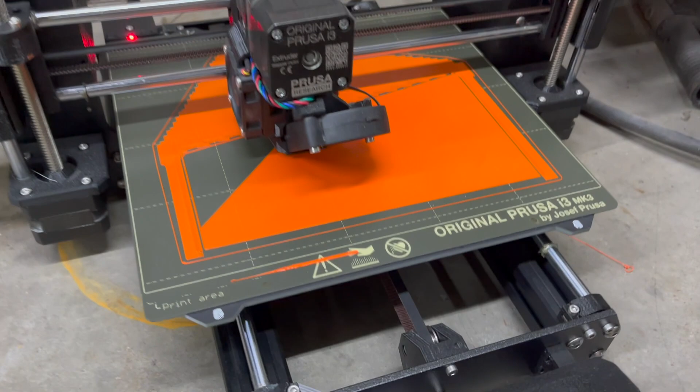So I am back in Arkansas, and I'm actually working on my newest version of the Nova brackets, which is now version 5. But just a little update.

I got the rest of Tom's chassis welded yesterday. Dennis and I are getting ready to put the chassis back on the chassis table, bolt all the suspension to it, put the body back on, and today it will roll off the chassis table. Then he's gonna start fitting doors, deck lid, front end, all that kind of stuff. After that, I'm not sure exactly what's gonna happen with it. I don't know if Tom and his guys will finish it or if they want it to stay here. So that's up in the air, but it's still gonna be a pretty cool video.

Just of us assembling, going back together, because my stupid phone screwed up and didn't actually get my time lapse of us taking the body off.

Side note, aside from doing the Nomad, I'm going to show you all the different revisions that I've went through of the Nova brackets, and now I've actually came to a 2-piece bracket that I'm going to weld together and then ship out as 1 piece. I was trying to keep it all in one, but with where the shock is versus where the control arm mounts, I couldn't get the shock mount somewhere to where I can actually unfold everything and have it cut as 1 piece, because they would all hit each other.

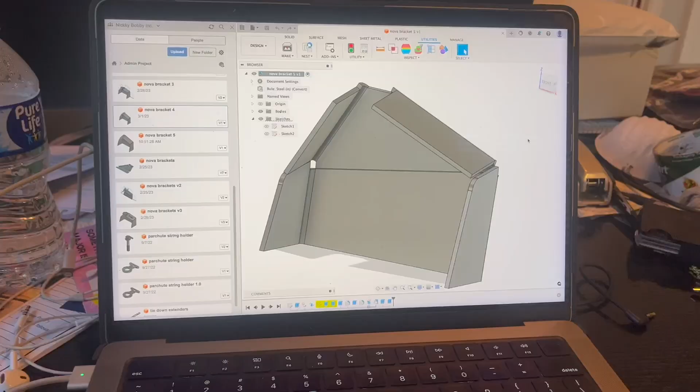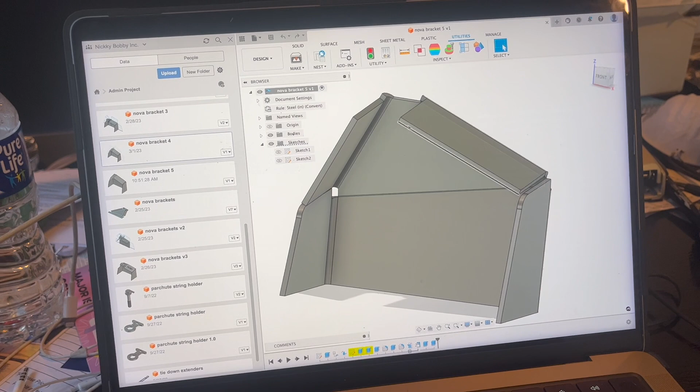So here's what I got, and here's what I'm thinking. This is my final version. It's actually gonna look a lot like the regular brackets I have now, but instead of having a shock piece that bends down here, I'm gonna have a separate universal shock mount that fits right in here, so I can sell a universal mount on my site, and I'll also use that same mount to mount the shock that I'll just weld around. I tried to have it to where I bent tabs down here, but there's no actual possible tool path in the world that can bend that tight of a radius that I need in this thickness of metal. So that option kind of went out the door.

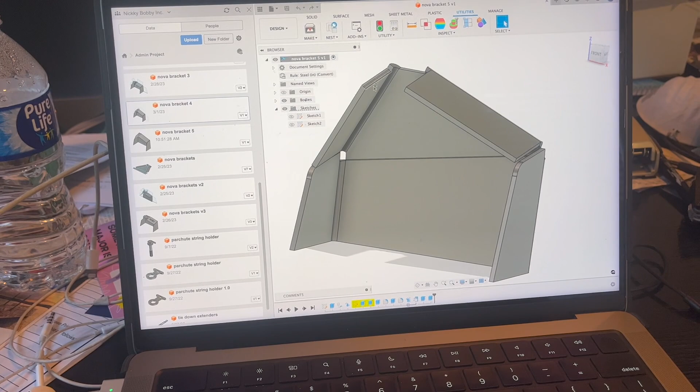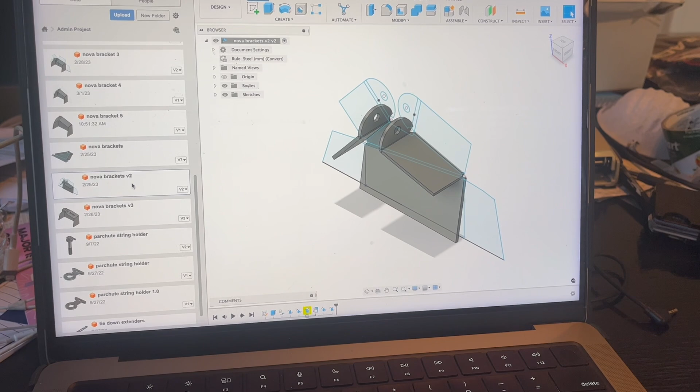But here's where I started at. Here's my first Nova bracket there, and it basically was not close at all, but it's almost the exact same as what the G body brackets were. Here's my second Nova bracket. I screwed it up majorly, so then here's my V3, which I thought was gonna be super close, but was a little too big. Then I got V4. That's where I bent the tabs down. That ain't gonna work. So now I'm at V5.

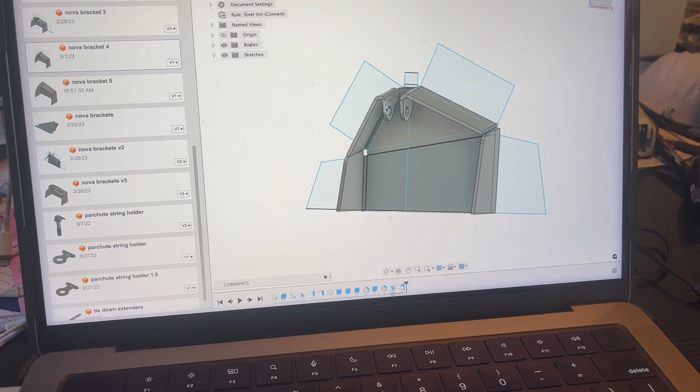So basically these tabs right here will just be a U-bend with these tabs that I will bolt into, or that I will weld into right here. So that's printing right now.

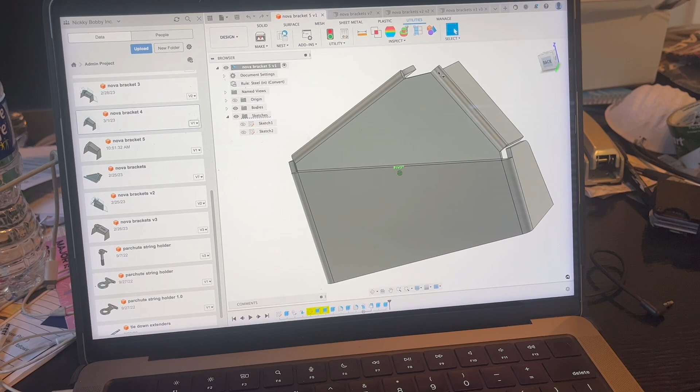I'm gonna go get started and get to work on getting that Nomad chassis back on the jig and the body back on the chassis, so that way I can get back to welding up the G body brackets and lift plates that I now have for sale.

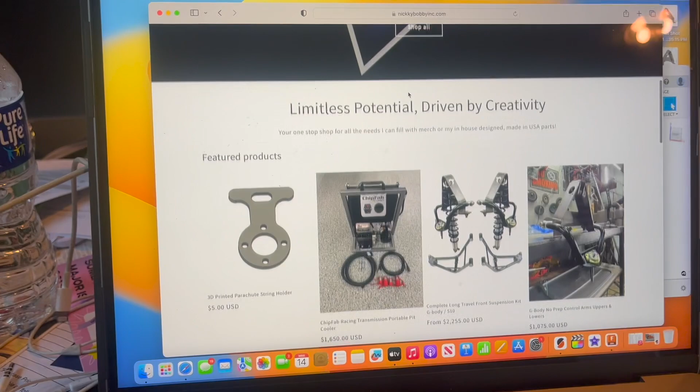So here's the new lift plates. Bada boom, bada bing. Designed by Bruner himself, called punch plates. They look like brass knuckles. Super cheap, 50 bucks. Then I've got the new and improved Nicky Bobby Inc. long travel brackets.

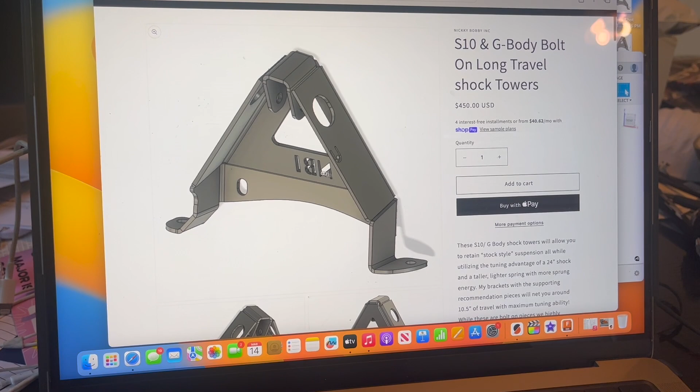These now have my logo in them. They're clearanced for if you already have TRZ arms. This little notch right here is for the TRZ arms because people were having to notch them. And I put this little tab right there, so that way you can basically take a punch and bend this in and then mount your shock travel sensor right there. It gives you a little tab to fold in. So those are the new improvements on that. Nothing crazy.

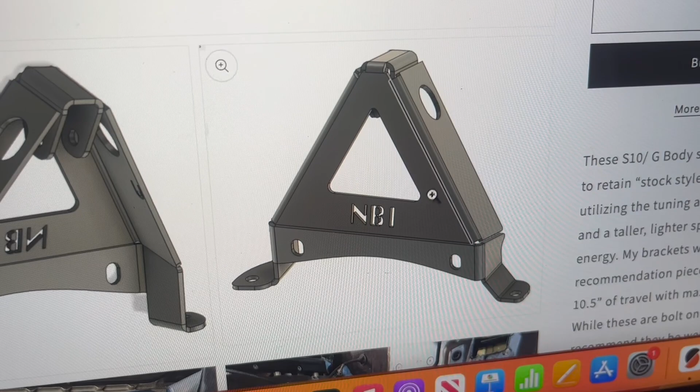As you can see, I did round the fillets on those edges because they were pointy and people said I should fix those. So I fixed a few little things on that, but mainly I've been working on the Nova brackets. So that's where I'm at now.

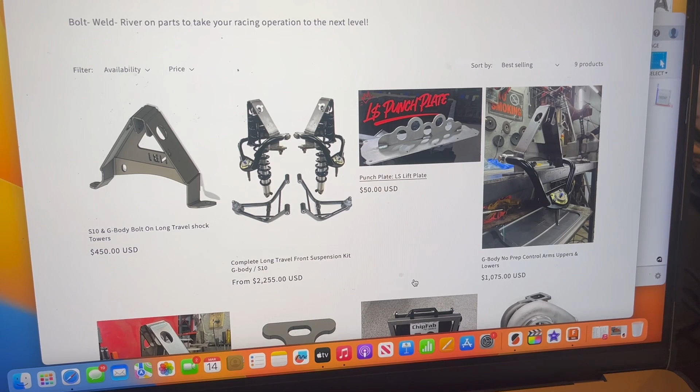I believe in the next week or so I'm going to be getting Eddie's car in here and working on the red Mustang. That is the last customer car that I'm ever gonna do. And then it's gonna be an awesome build.

There's a lot of things that I wanna print for it. Like I wanna make the gas cap where the gas tank fill neck was - I wanna make that the fill for the ice tank, which is gonna be back there. Then I'm gonna make some bulkhead stuff, I'm gonna print some bulkhead stuff. I've got all kinds of creative ideas for that.

And then I may also be heading to Georgia to do a collaboration with another YouTuber that is pretty well known, but we haven't set the plans in stone yet. I'm excited about that though - it's gonna include big blocks, blowers, and loud noises. So I'm gonna go get to work and I will take you guys along with me.

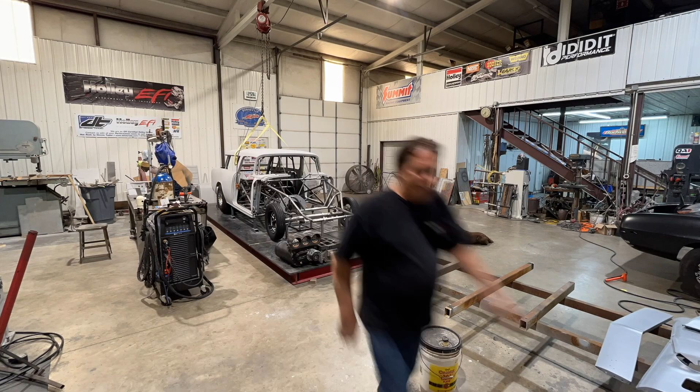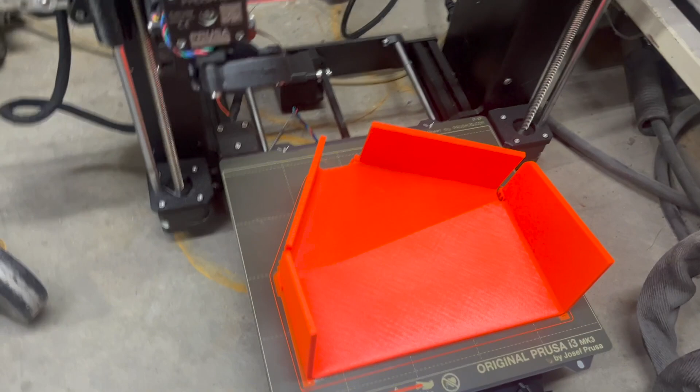All right boys, the new print is done. This is my next revision of the travel bracket, and then just a little universal shock mount will go in there and get welded, so that way these bends don't get all messed up. So I'm gonna break this thing off, and then I'll show you what Dennis and I did on the Nomad yesterday.

So here is my universal shock mount, boy. Print's done, I just showed you. Now I'm gonna go print this while I get to work on the Nomad.

Dennis went over a bunch of stuff with me yesterday. Him and I set the chassis back on, the suspension on the frame table, then we set the body back on, and then he was just telling me all the other stuff that needs done, so him and I are gonna work together on that stuff. He kind of told me how he wanted stuff done, which he knows way better than I do, so I actually started working on a transmission mount that is also a slider last night, and he showed me how to bend tubes with a torch - I've never done that before.

But before I get sidetracked with all that, here's what I'm thinking for this Nova travel bracket. Since, like I said before, to make these two bends would be too much, so that's why I left this out. But now I've got this piece, so this could just act as a universal shock mount that you could literally weld anywhere.

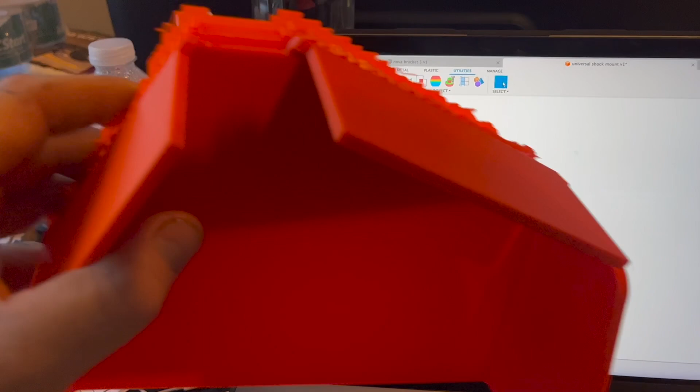But now that little piece right there will fit right inside there, and I'll just weld like I normally do, right there. So that way I could have two pieces that make one, or just sell one piece individually. I already put that on my SD card. I'm gonna go get this thing started printing, and go get to work on the Nomad.

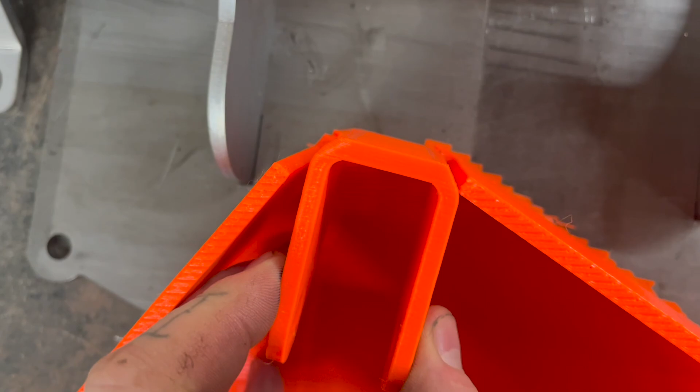Check this out boys, bam. So I actually took this down a little bit to allow for more room, but I think I'm gonna end up putting this notch back so that this will actually sit right in there - so I don't have to have that gap. I can put that back and then my shock will sit right here. Bada boom, bada bing. Then I just weld that up right there.

Pardon my supports, I haven't got them off yet. I haven't found the easiest way to get all those junk supports off there yet, but this is pretty stinking cool if you ask me. Look at that, look at that.

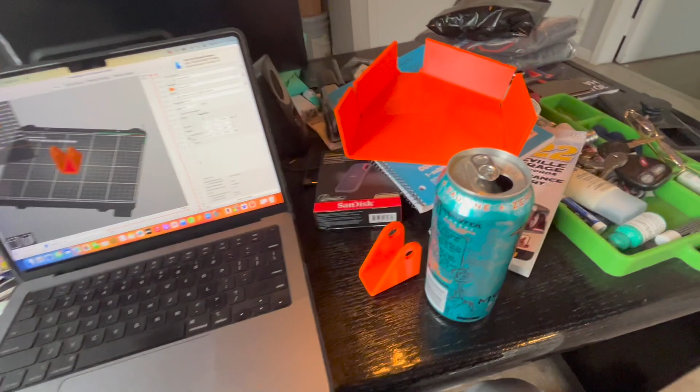So I just measured this, and I just got done printing it - 12 freaking hours. This right here measures outside to outside 8.1, and it's supposed to be 7.75 to fit inside where I need it to fit inside the A-arms. So now I have to go back through my Fusion file and change my sketch to see if I can fix it. But sometimes when you try stuff in Fusion, the sketch and the bends get all screwed up because the bend radiuses get into each other. So I'm going to see if I can fix this without screwing anything up.

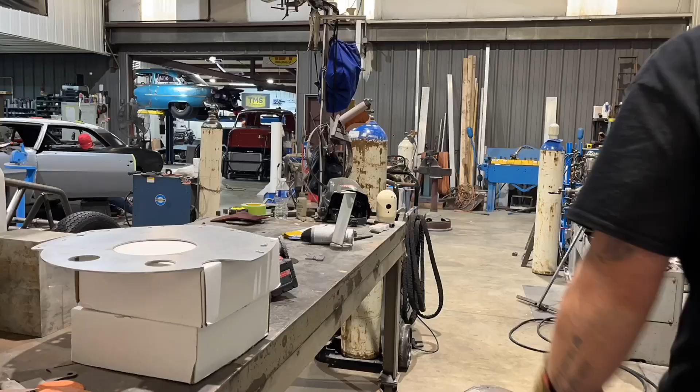Oh yeah, it'll get me demonetized.

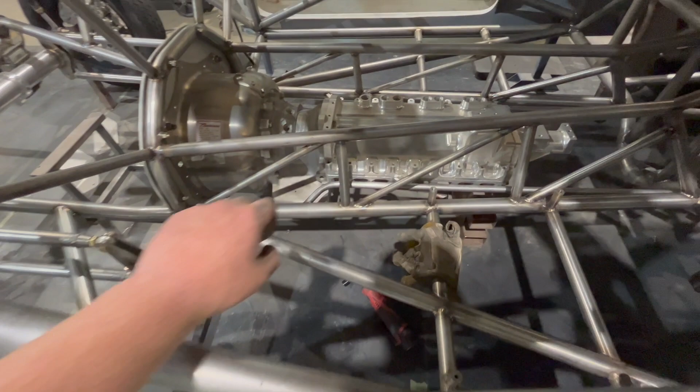So what we're doing here is Dennis wanted to put the transmission on sliders, so he actually taught me how to bend tubing yesterday without a tubing bender. I don't have a die for 3/4 inch, so we used a rosebud oxyacetylene torch and that vise right over there. He bent one and then handed it to me and said do the other, but he showed me how to do it first.

I got both these tubes made and put in there, and that one over there only took me about 4 hours and almost the whole sanding belt over there, grinding on it. He said if you take any more off that, you better just get an air grinder.

So that tube's made, this tube's made, and we're making little brackets that come up and around so that this can slide back so they can change the torque converter.

So Dennis is showing me how to run a lathe, but I've never used a lathe before, never used half the tools he has in his shop. I'm of the Harbor Freight generation, the cookie CNC cutters generation.

Normally you'd draw that out, and here's my issue with that. Some people, the fancy people, have a CNC plasma cutter in the shop and they're good with the software, but for me, every bracket's different, and I know the good guys can draw that up in 8 seconds and cut it out on a plasma, but I don't have the room or the need for it.

So you did that on a bandsaw and it looks just about as good. Yeah, it took me a long time, but I'm just trying to make sure I get it right, that way I'm not having to make a bunch of adjustments. But the next three will go like 8 seconds.

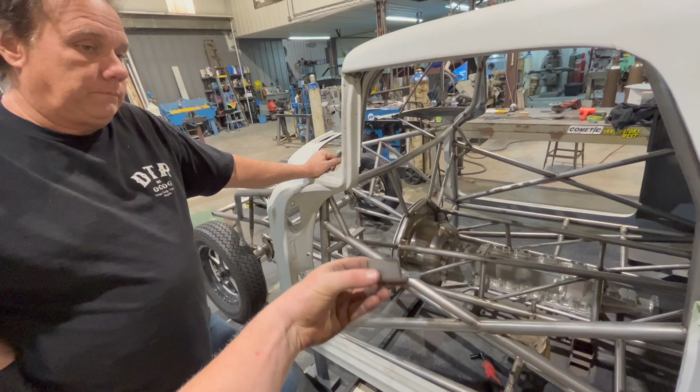Super fast. So what we're doing is this is going to bolt on the transmission, and then he's got a piece of tube that's really thick, and we're going to turn the inside down to fit that 3/4 tube, cut it in half, weld it on here, so this basically has a hook on it. So this will bolt to the transmission, the hook will set on that slider tube, and we'll put hose clamps around it. So then when you want to move the transmission back, loosen the hose clamps, and this slides. So it's actually a transmission mount / slider.

The transmission is supported with the mid plate and everything, it's pretty self-supporting, but we're going to put hose clamps around it at the back. You're going to put some stabilizer tubes to help stiffen that 3/4 tube up. That'll hold the transmission, or keep it from vibrating, whatever. It doesn't need much, you'll be able to slide that all the way back.

The way you set it up is, I'll go back 10 or 12 inches, probably 10. And if that's not enough to get the converter out, you'll be able to raise it up, slide it on back, and the converter will sit on your tubes. So it'll be nice, that's a big help.

Yep, it's slow progress, but this is kind of in the junction of everything, in the middle of everything. And I want to make those two tubes the exact same height and perfectly square with the transmission, because when you're sliding something, it has to be square or else it'll bind up and suck.

So one of the things to come is the real transmission, that's just an empty case right now. It'll have a gear vendor adapter on the back of it, not that tail housing. So when I built the chassis, it's all very tight, but with the gear vendor and the spacer, it'll slide back into those two upright tubes, so we can actually slide the thing back plenty far enough to get the converter out, that way they're not dropping it on their heads or anything like that.

We probably need to make a handle to attach here, so you can just pick it up, lift it up, make it easy. That'd be awesome. All right, well, we're going to turn down that piece and cut it in half, and then I'm going to keep going. Let's do it. Come on. It's a good thing I don't have any hair.

I've seen horror stories of people getting their hair caught in lathes. It's worse if you get your shirt or something caught in there. I see these videos from India, Pakistan, whatever, and they'll be working in their robes, and it's so close, it scares me to death. So when I was in high school, we had wood shop, and a girl got her hair caught, I think it was wood shop, I don't remember exactly, I wasn't in the class. One of the classes had a buffer, and the girl got her hair caught in there, and it scalped her. I didn't see it, but I heard the stories. Have you ever gotten hurt by one? Nope, never have. Been doing it since high school.

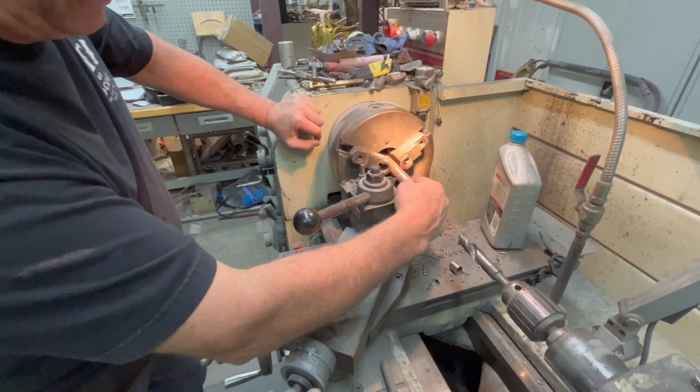So what I would do, we've already drilled the hole, so we just bored out some 1-inch DOM tubing with, I think it had a 5/8 hole in it, and we bored it out to 3/4. So we're just going to cut it here, and instead of getting too carried away with it, I would just put this right here, roll it over till it matches up. Yeah, and then I was going to make it a little longer.

Oh, you're going to do the hose clamps, right? Yeah, so it needs to be like 3.5 long is what I measured. Okay, let's find a tape measure then. Or is there a caliper here? There's a tape measure right here. Here's a caliper, let's use that.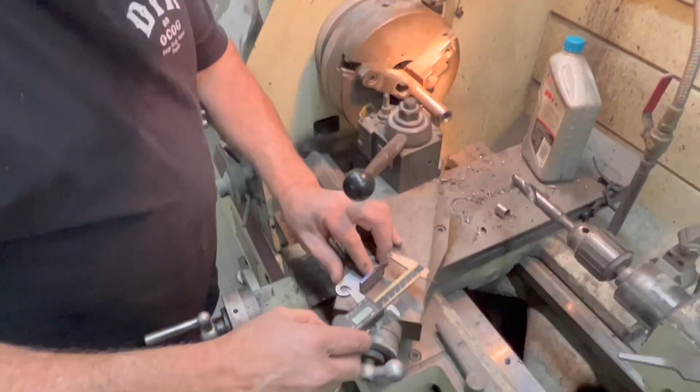So 3.5 is going to put us... is that drill bit even 3.5? That's pretty long, you really need it that long? No, I could actually cut this down so we don't have to go super long. You're going to put a hose clamp on both sides or one side? I was going to do both sides, but if we only need one, we could just do that. It doesn't have to be 3.5. I'd say 3 1/8 anyway, so I can probably fit that drill bit. We got to scoot this back a little bit.

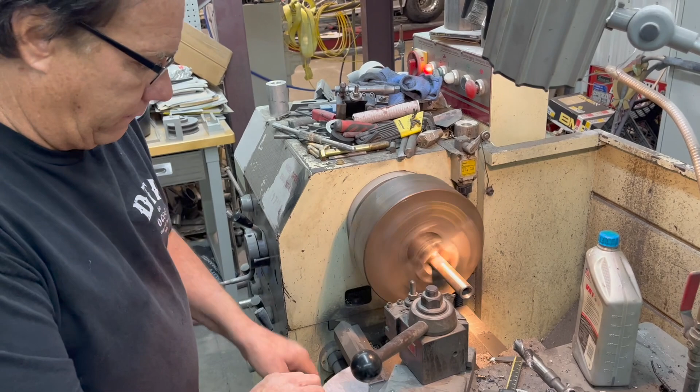So we're just going to loosen this. This is a very precise 3-jaw chuck. Some of them are not. Chinese chucks are not very accurate, but this one is very accurate, as you can see. Don't worry, I'm a professional, I'm not going to cut my fingers off. I hope not. If it was going to happen, it happened a long time ago.

So you'd like them to be 3 1/2 inch out? Yeah, that's fine. I think that's too much, let's go 3 1/4. Okay, so that measures 3 1/4.

This cutter's a little dirty, a little worn out, and it's also bent. It's lived a pretty hard life. I really should slow it down just a little bit.

Oh yeah, it's so much better than just cutting it with a saw. See, you can see the way the cutter's set up, if you look back in the groove, the cut is tapered this way, so when it cuts, it'll fall off. Otherwise, if it was angled the other way, you'd have a burr on the edge of that pipe. But it'll cut off, the pipe will fall off, and it'll leave the little piece on the piece that's in the chuck.

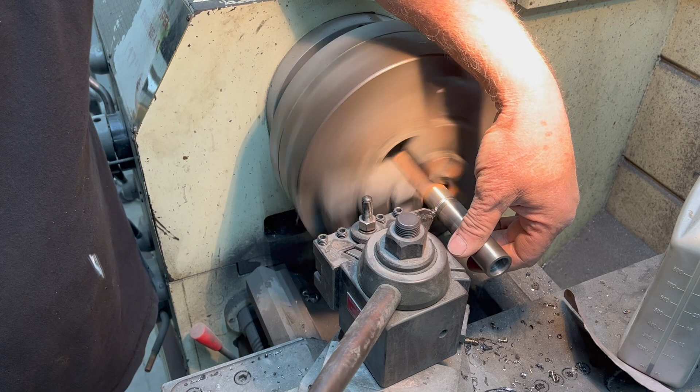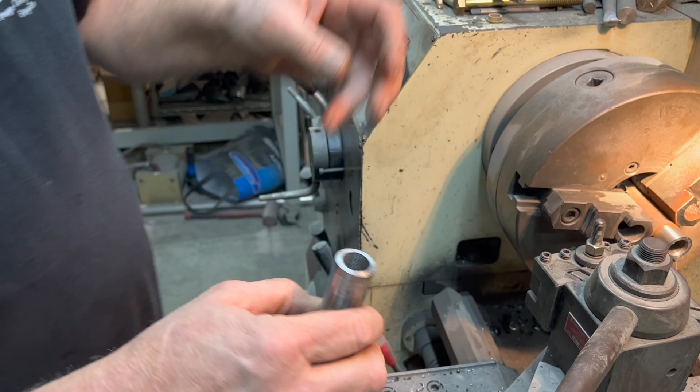Like I say, this bit's very worn out. See, it cut that piece off second, so it cut it off nice and clean. But now what I would do is come in, get the stock out of there, put this back in.

Take a file and just radius that edge a little bit and knock the burrs off the end. Lots of ways to do it. You can put a bit in the thing, but that'll be fine like that.

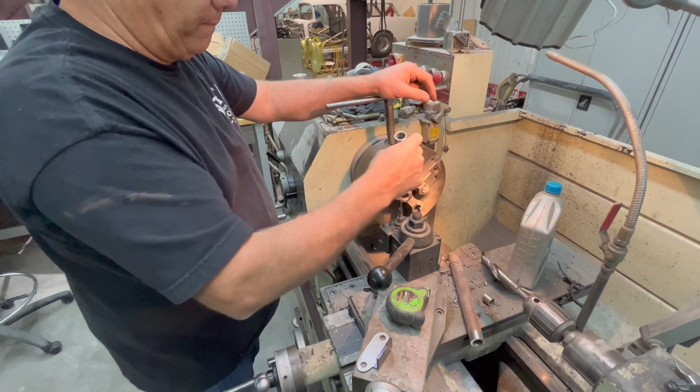So now it's got a 3/4 inch hole in it. Nice. So now I just got to cut it in half, and then it gives me 2 brackets out of that one piece.

That's right, I stand it up on the bandsaw like this and cut. Otherwise if you go in this way, it's going to be all crooked, and our blade is a little bit worn. So if you at least go in like this and make the scribe line, it'll go in halfway. You can do it that way, you'll have something to follow, but that's the way I do it.

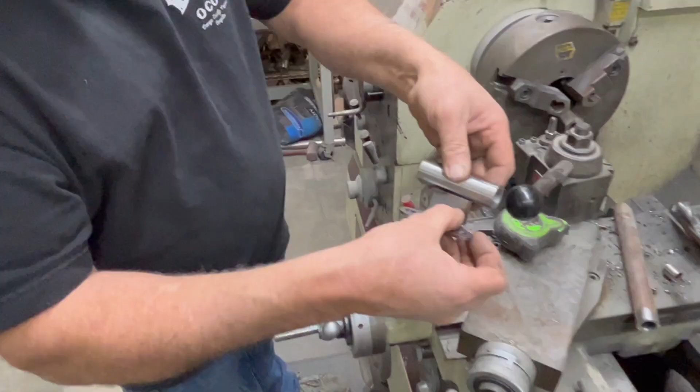So you're going to have this set up. Well, it'll be kind of like that. Yeah, that'd be a nice bracket, it's going to be real nice. Then 2 more to go. Bring the band in.

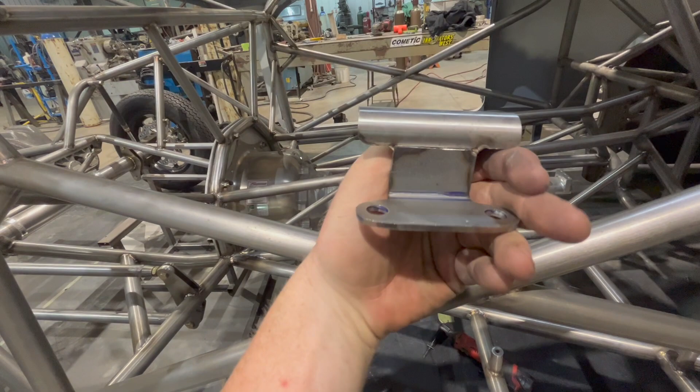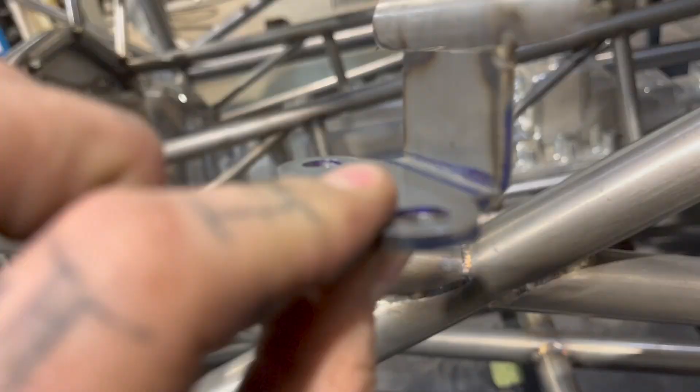We won't fit in a box. We don't quit, we won't stop. Ride us all to the top. We won't fit in your, we won't fit in your, we won't fit in your box. No, we don't quit, we won't stop. No, ride us all to the top.

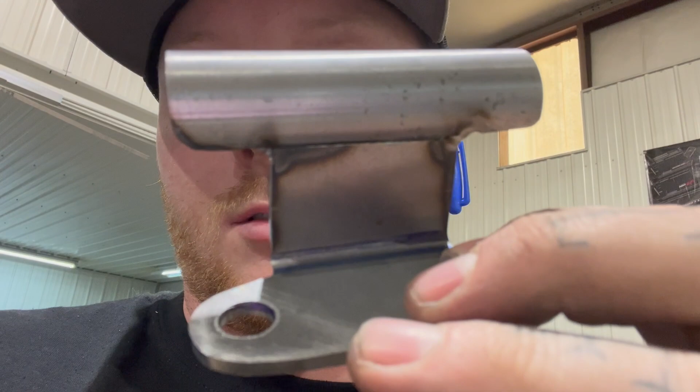So what I did was put the bracket on and rotated this around until it touched, tacked it on there so it perfectly fits on that tube. Now I'm going to weld it up and continue making the other 4, 3 of them.